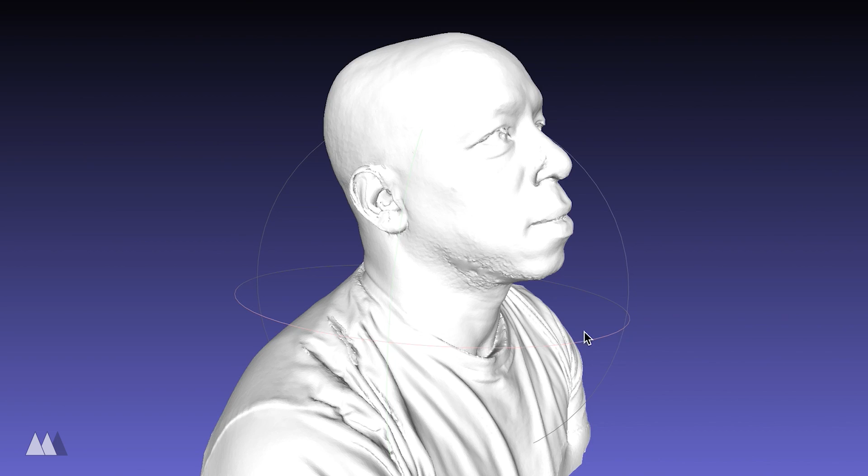I actually have very limited experience designing glasses or any type of wearables, but I thought it would be a good challenge and a great learning experience, so let me go ahead and share that with you. Here we have a 3D scan of Ian Wright that was provided to us by My Mini Factory. And as you can see, it's very detailed and it is true to scale, so it's a perfect reference for building these glasses around.

Now this particular scan is really high resolution, so it would probably crash SolidWorks. So I took it into MeshMixer and reduced it into this before bringing it into SolidWorks. Now it's a little more manageable and I can build my glasses directly around Ian's head. So I'm just going to take you through the steps. I already finished these glasses, but I'll show you a little bit of what I did.

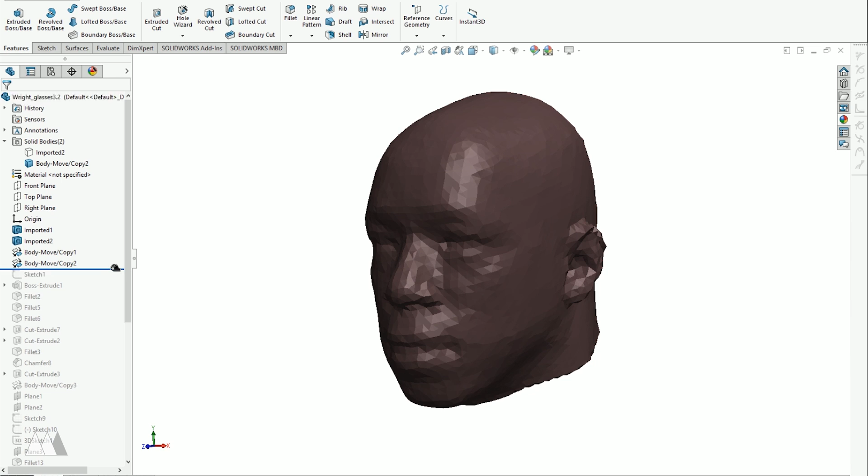So a lot of work got done in the very first sketch, where I drew out the basic shape of the entire frame. Now while it is a single action, it does take a lot of work to really finesse the curves and get everything just right. So I threw in some more fillets to kind of get everything more rounded to match the feel of the lenses themselves. So this is my rounder version of the glasses, and then I'll have another one that's a little more square.

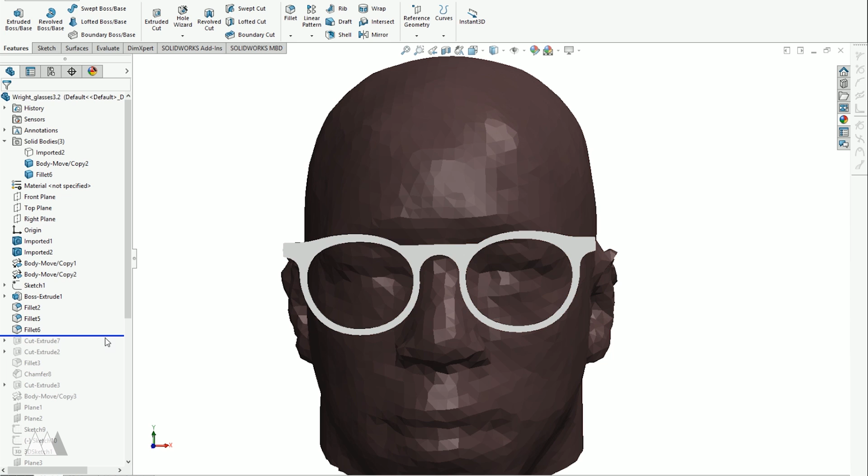I put a chamfer on the front here, which will help everything print cleaner, and I threw in a little W graphic here because these are, in fact, custom glasses for Ian Wright, and 3D printing is all about customization, so why not throw in a little flair right there.

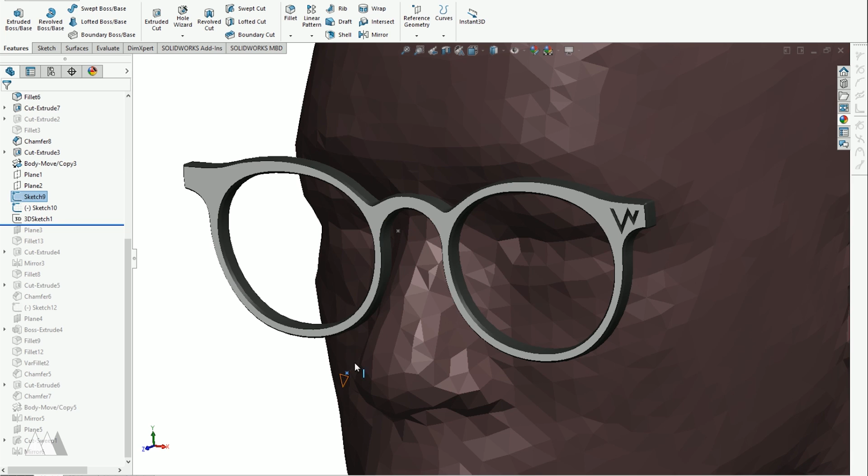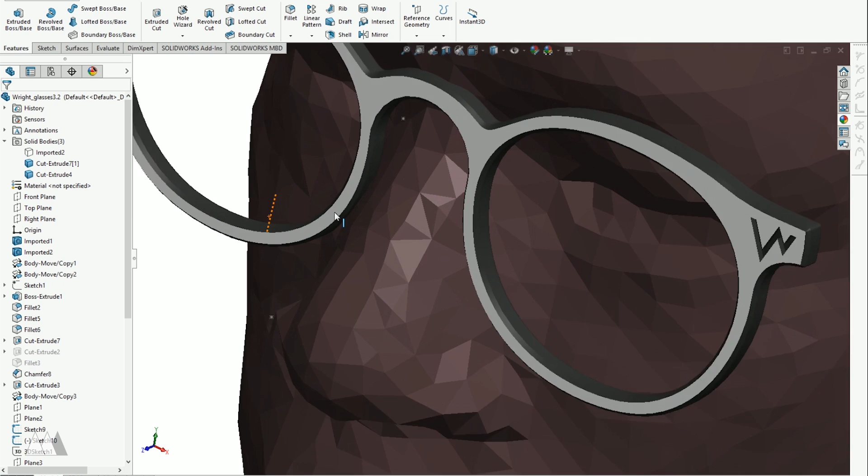Alright, moving further along, this was a very subtle thing I did. I'll have to hide Ian's head to actually show it, but I created a small diagonal cut into the back of the lens, which will help the glasses rest on his nose a little better. It's actually made exactly for Ian's nose as well, because I noticed where my model was overlapping with the 3D scan, and I was able to just shave it away so that it'll be a more comfortable fit.

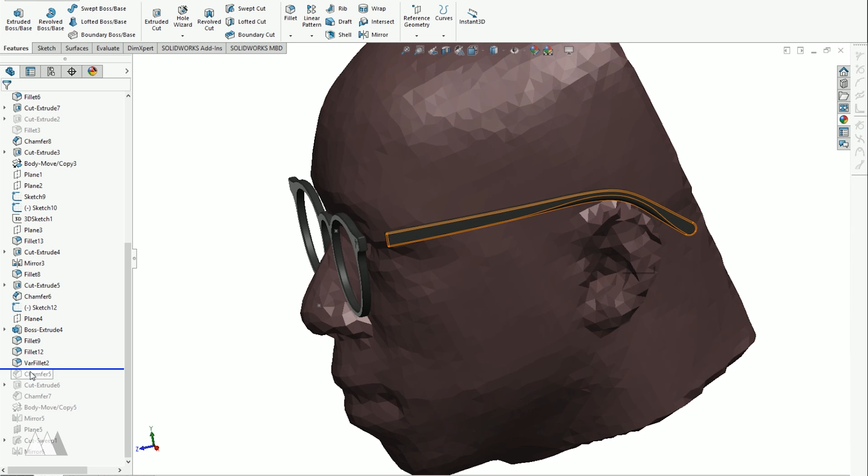Next I added the indentations where the metal hinges will go, so I'm not actually going to print the hinges in this model, but real hinges are going to be added later. I sketched out the arms in a very similar manner with this arc in the back, and both parts are 4mm thick, so it's pretty lightweight, and here I put a variable fillet onto the arm, so it's 0.6mm all around except right above the ear where it's 3mm, and that'll make it more comfortable to actually be wearing. I have a similar cutout for the hinge on the arms as well.

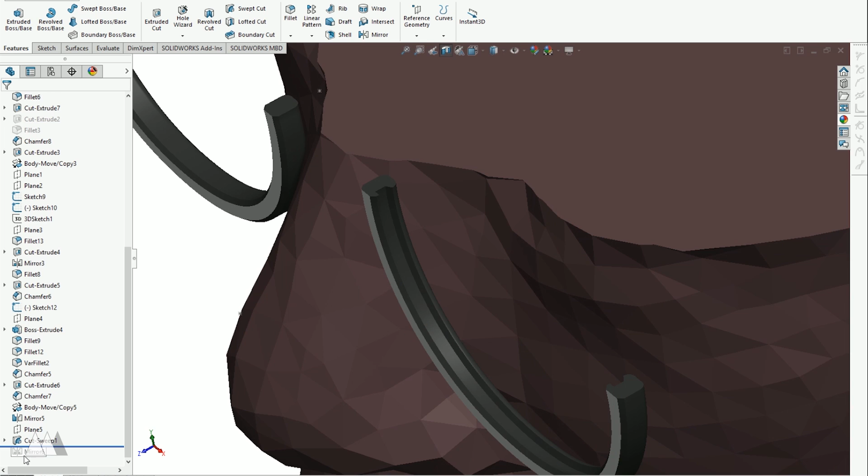And lastly, I did a sweep along the inside of the rims to get this indentation all the way around, where glass lenses can be fitted to actually be held in these glasses. And to do that, I just converted the outline of the lens so that I have a curve for the sketch to follow. And this is the cross-section of the actual cutout, based on the dimensions that they provided us for making this work. You can see there's a slight angle here, and that's just so this can print without any supports.

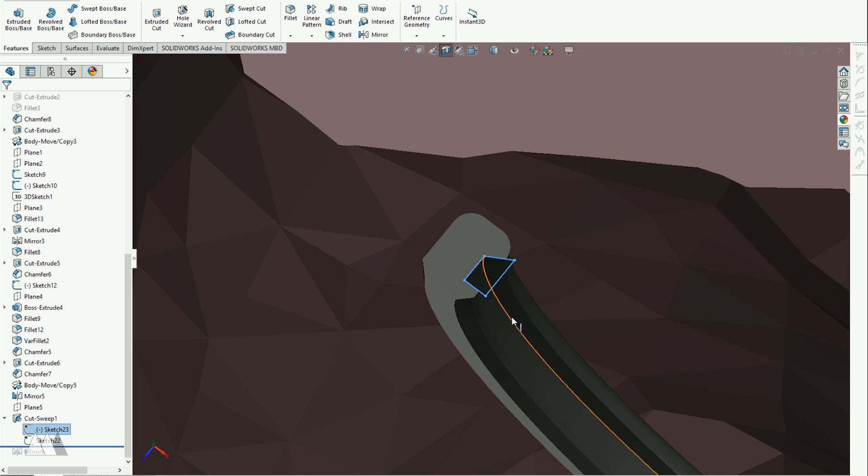A big goal of mine with this challenge was to avoid support material so that these glasses are nice and smooth all over and they're actually very comfortable to wear instead of having that rough surface you get when you're using support material. And that's why this is actually a flat design, so I can build it flat on the build plate, and then I'll actually curve it after the fact using a heat gun.

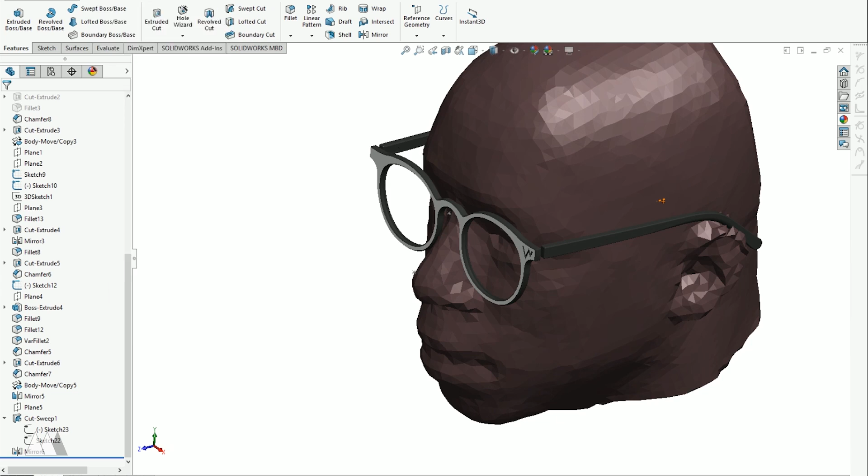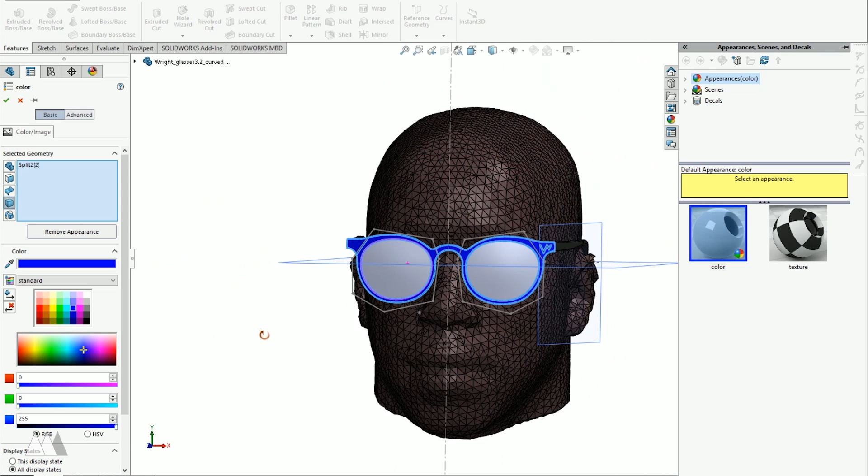Although I did also create a model with the curved lenses in SolidWorks, just so that I could visualize what it'll look like and how much of a curve I want for this to really be a perfect fit for Ian. Maybe let's not go with blue for the lenses, although who knows? It's 3D printing, so you can choose whatever colors you want. It's pretty fun actually to just quickly swap through different colors and see how they'll look. But in this case, I thought black and white is nice, it's classy, and it's elegant.

A good fit for Ian Wright. So that was the first pair I designed, and then I made this other pair that has a little bit more of a square feature, and I also wanted to try out some interesting treatments of the front of the lens that would be more difficult to achieve without 3D printing.

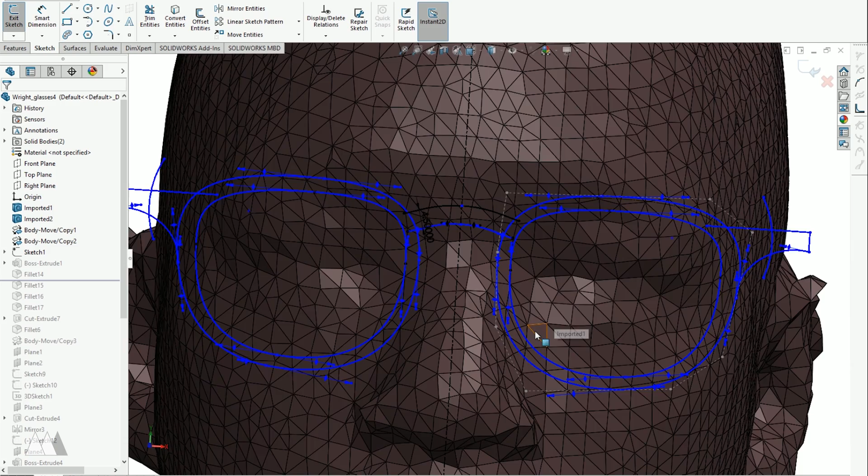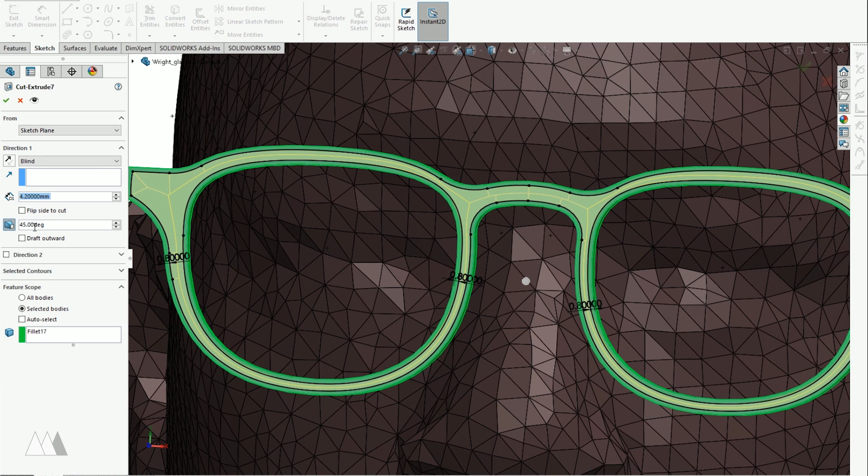So as you can see, the nose here isn't quite a half circle like it was on the other glasses, because I want it to match the shape of the frames. And now here is my favorite part. This is a really fun effect I like to do, where I just offset the entire outline of these glasses, and then I did an extrude cut, but I used a 45-degree draft so that all the lines come to a point. And it looks super cool, and because it's a 45-degree angle, it'll print with no problems.

The arms of these glasses are essentially the same as the last model. I just made them a little thinner up front to better match these frames. So here's a little rendering I created of what the end result should look like.

Here I am printing out the arms, and as you can see, my printer made very quick work of it. These are thin, they're printed flat, so they print really quickly and neatly. I made two versions of this particular style, one with a black backing and the other with a red backing, and the front is white on both of them. So I actually did a filament switch after printing, I think, 0.6 millimeters or so.

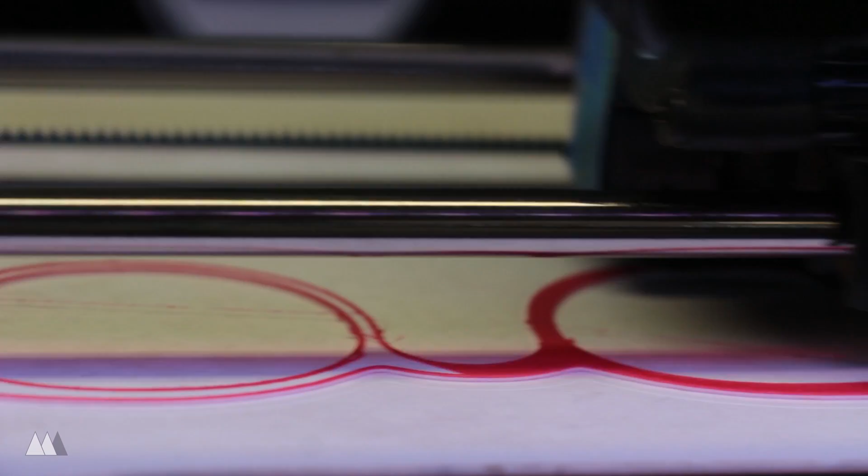And here I'm using matte HT PLA, which is a heat-treated PLA that has a nice matte finish. It is a little more stringy than your standard PLA, but I really love it. Here are my other frames. You can see they peeled off the build plate just a little bit, but since I'm bending the frames anyways, it's not really affecting the design.

So speaking of getting that bend in the frames, what I did was get this thin sheet of aluminum from a hobby store, and I ran it across the edge of my workbench to create the curve that I want for my glasses. Then all I've got to do is center the frames on top of that curve and give it a quick run over with the heat gun on low temperature.

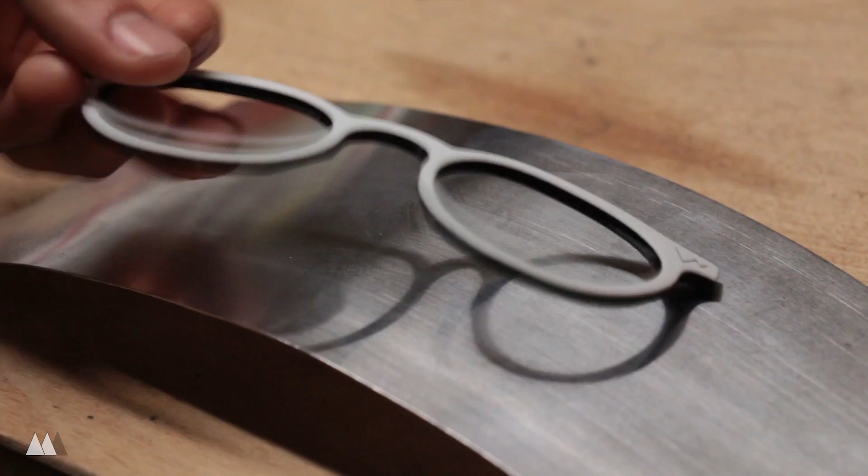This is actually really fun to do, and because PLA gets soft at such a low temperature, you can probably also do this with a hairdryer or just by soaking it in warm water for a while. Here are the frames after I let them cool down for a minute, and as you can see, they hold that curve really well. So I went ahead and did that with my other frames too.

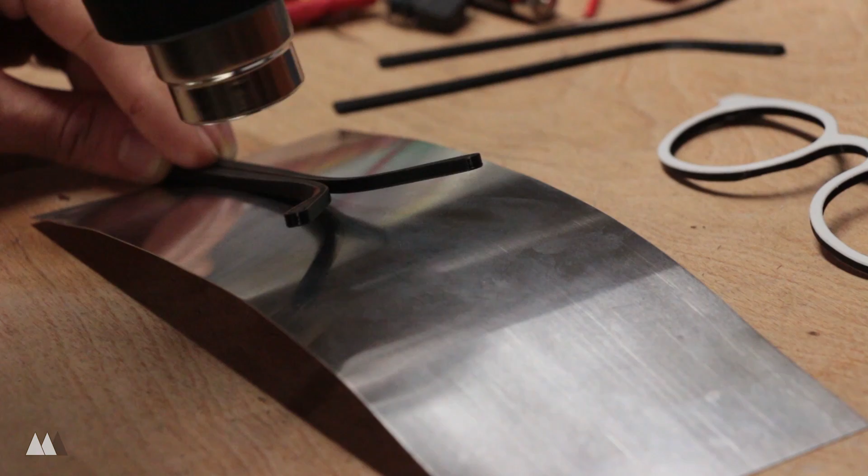Interestingly enough, when I was heating up these red ones, the edges kind of tapered up like this, and I really like how it turned out. I did the same thing with the arms of the glasses, although since they're a little thinner, it might take some hand manipulation to get them the shape you want.

As I mentioned, these are designed to use real metal hinges, but for the sake of prototyping, I just used my 3Dsimo Mini to weld the parts together. You could use glue, but using PLA with a 3D pen will create a really good bond, and it also gives you a little more versatility. For example, the arms weren't perfectly even, so I was able to just heat them up with the gun again and bend it down into place, so that everything is exactly how it should be. All that's left is to try them on.

Not bad. I mean, I personally wouldn't wear white glasses because I'm white enough, but these are designed for Ian Wright. He has a slightly darker complexion, so I think these glasses would look really good on him. I think they fit pretty well and they look good, so I'd call these both successful.

Alright, that's it for this one, guys. It's a shame I don't actually wear glasses anymore because I would have had a lot of fun making all kinds of prescription glasses for myself. But as you can see, these look really great. They look like a finished product. If you put some real hinges on here and got some lenses made for it, these could totally be everyday glasses. Another example of an end-use product you can make with 3D printing.